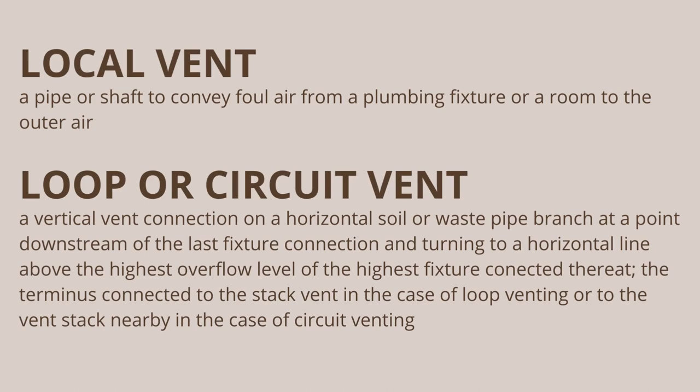Macerating toilet system: it is a system comprised of a sump with macerating pump and with connections for a water closet and other plumbing fixtures, which is designed to accept, grind, and pump wastes to an approved point of discharge.

Main: the term used in any system of continuous piping, which is the principal artery of the system where branches are connected.

Main sewer: it is also known as public sewer. It is a common sewer directly controlled by the public authority to which all abutters have equal rights and connections.

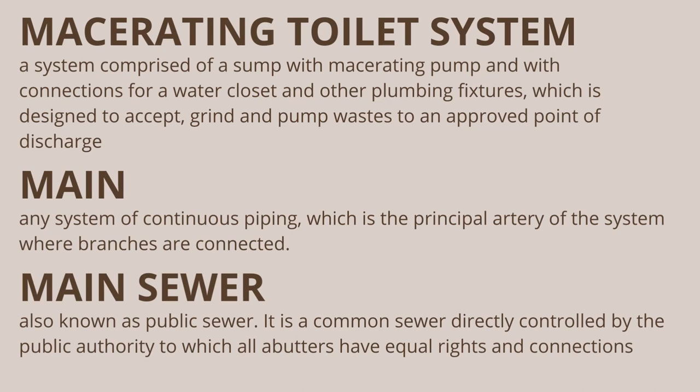Main vent: it is the principal artery of the venting system to which vent branches are connected.

Manhole: it is a large opening in a sewer line or part of a plumbing system constructed with sufficient size for a man to gain access therein for maintenance purposes and facility for changes of line and/or grade of pipeline.

Master plumber: it is a person technically and legally qualified and licensed to practice the profession of master plumbing without limitations, in accordance with Republic Act 1378, having passed the examination conducted by the Professional Regulation Commission, has received a certificate of registration from the Board of Master Plumbing, and possesses the current license to practice.

NAMPAP: it stands for National Master Plumbers Association of the Philippines.

Oakum: it is a hemp or old hemp rope soaked in oil or tar to make it waterproof.

Occupancy: the purpose for which a building is used or intended to be used. The term shall also include the building or room housing used. Change of occupancy is not interpreted to mean change of tenants or proprietors.

Offset: in a line of piping, it is a combination of elbows or bends, which brings one section of the pipe out of line but into a line parallel with the original section.

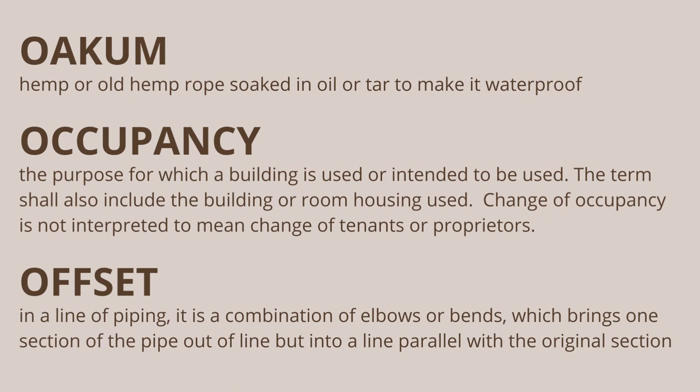PB stands for polybutylene. It is a tube made of plastic material and colored black. The cross-sectional shape is normally oval and is denoted by its outside diameter, or OD. Normally used as water service connection from main to meter.

PE stands for polyethylene. It is a tube made of plastic material and colored black. The cross-sectional shape is circular and is denoted by its outside diameter.

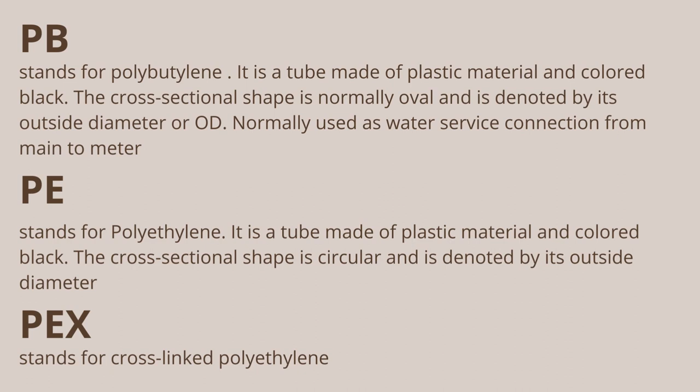PEX stands for cross-linked polyethylene. Pitch, also known as grade, is the slope or fall of a line pipe with reference to a horizontal plane.

Plumbing is the art and technique of installing pipes, fixtures and other apparatuses in buildings for bringing in the supply of liquids, substances and/or ingredients and removing them. A plumbing appliance is any one of a special class of device or equipment intended to perform a special plumbing function.

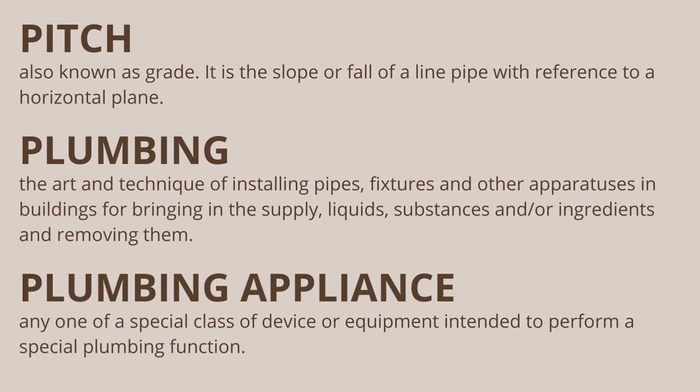A plumbing appurtenance is a manufactured device, or a prefabricated assembly, or an on-the-job assembly of component parts that serves as an adjunct to the basic piping system and plumbing fixtures.

A plumbing firm is a sole proprietorship or corporation composed of registered and licensed master plumbers together with allied professionals.

Plumbing fixtures are approved type installed receptacles, devices or appliances supplied with water, or that receive liquid or liquid-borne wastes and discharge such wastes into the drainage system to which they may be directly or indirectly connected.

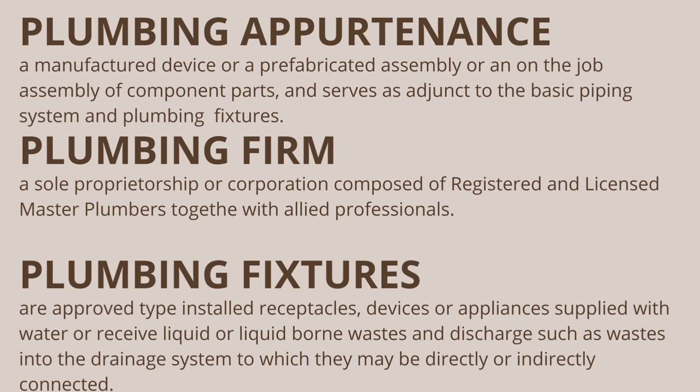The plumbing official is the administrative authority or the officer charged with the administration and enforcement of the National Plumbing Code, or his regularly authorized deputy.

The plumbing system includes all potable water supply and distribution pipes, all plumbing fixtures and traps, all sanitary and storm drainage systems, vent pipes, roof drains, leaders and downspouts, and all building drains and sewers.

A plumbing unit is a minimum standard quantity of plumbing fixtures that discharge wastes into a plumbing installation, including 1 water meter, 1 water closet, 1 lavatory, 1 shower head and drain for a bathtub or shower stall, 1 kitchen sink, 1 laundry tray, 3 floor drains and 4 faucets.

Pollution is an impairment of the quality of the water to a degree which creates hazard to the public health and adversely affects the aesthetic and potable qualities of waters for domestic use.

Potable water is the term used for water satisfactory for drinking, culinary and domestic purposes and meets the requirements of the Philippine national standards for drinking water.

Pressure is the normal force exerted by a homogeneous liquid or gas, per unit of area, on the wall of the container.

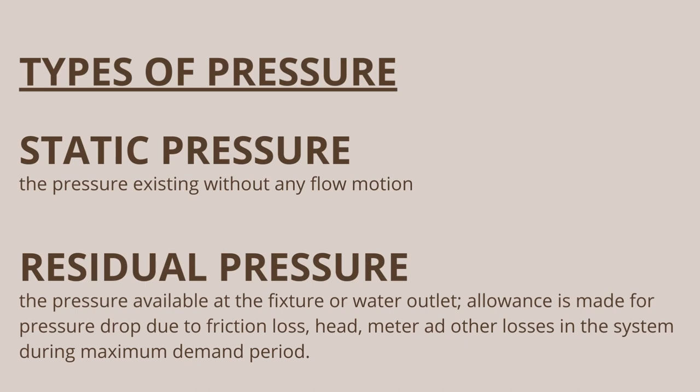Residual pressure is the pressure available at the fixture or water outlet. Allowance is made for pressure drop due to friction loss, head, meter and other losses in the system during maximum demand period.

Primary branch is the single sloping drain from the base of a stack to its junction with the main building drain.

Private or private use, in classification of plumbing fixtures, applies to plumbing fixtures in residences and apartments, to private bathrooms in hotels and hospitals, and to restrooms in commercial establishments for restrictive use.

A private sewage disposal system is a septic tank with the effluent discharging into a subsurface disposal field, into one or more seepage pits, or into a combination of subsurface disposal field and seepage pit or of such facilities as may be permitted.

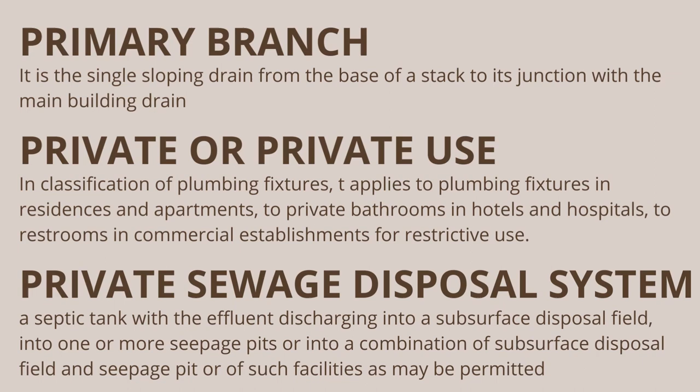A private sewer is a building sewer which receives the discharge from more than one building drain and conveys it to a public sewer, private sewage disposal system, or other points of disposal.

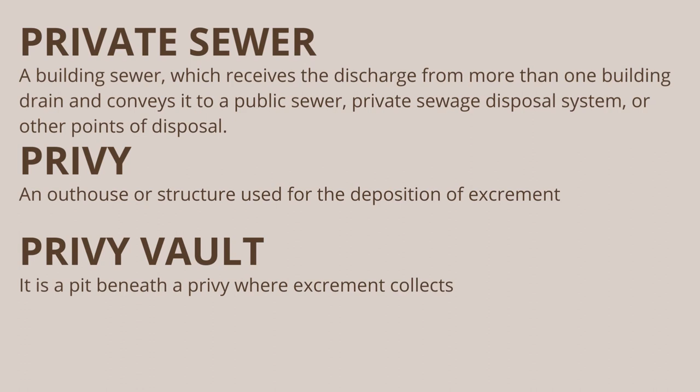A privy is an outhouse or structure used for the deposition of excrement. A privy vault is a pit beneath a privy where excrement collects.

Public or public use, in the classification of plumbing fixtures, shall mean all buildings or structures that are not defined as private or private use.

A public sewer is a common sewer directly controlled by public authority to which all abutters have equal rights of connection.

PVC stands for polyvinyl chloride. Potable water piping are color-coded blue while drain pipes are gray, orange or brown.

Quality of materials states that all plumbing fixtures and materials used in any drainage or plumbing system or parts thereof shall be free from defects.